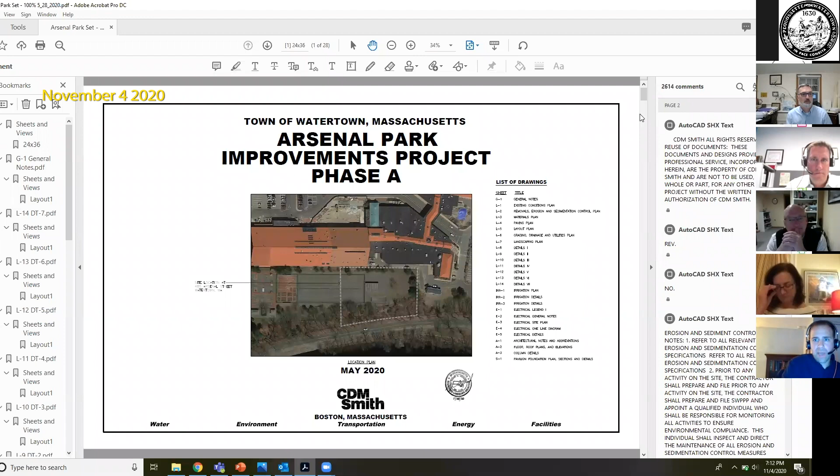Let me just grab that, and then share my screen. Let me know if everyone can see. Yep. Okay. I'm in the back part of the house, so my internet might be a little slow here. I'm relegated to the basement.

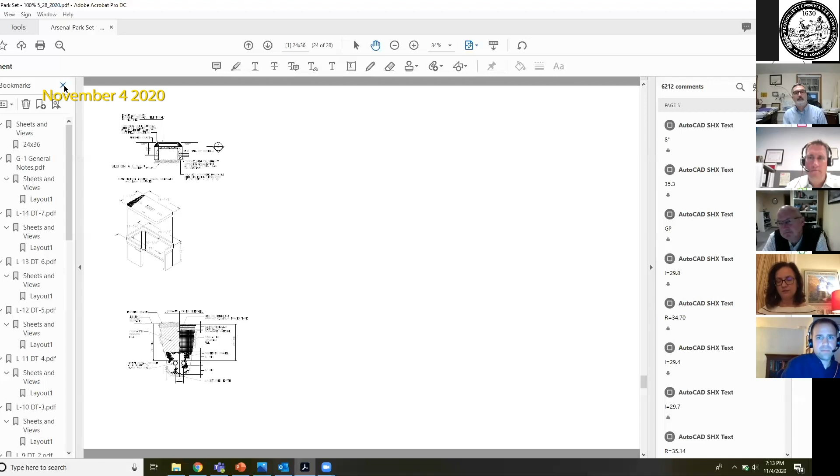While that's coming up, I'm just curious because I can't remember right now. The Phase A box on the graphic we were handed with our agenda straddles the community gardens. Is that in Phase B, or is the community garden in Phase A? The community garden will go in under Phase B. Okay, that's what I thought, but I just want to make sure.

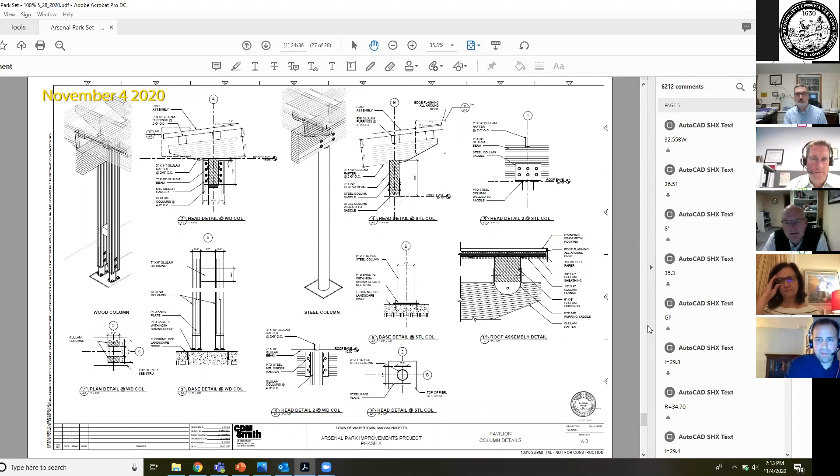Apologize for these drawings taking a second here. I think I passed the details, but I'll just start talking about it while we get to them. The way that these precast concrete elements work is that you should really think of them as a veneer. While they have all of the structural integrity of a normal cast in place element, you want them to be free floating so that you don't have to be pinning them in when you bring them onto the site.

So what we've done is designed essentially a concrete stair that sits underneath as a base, then you place a 3/4 to 1 inch mortar setting bed, and then these quote unquote veneered stairs sit on top of that. So here we go. Sorry, that took a minute. Now let's see if I can zoom in. I'm not sure why my computer is going so slow here.

For the various elements throughout the site, and I'll start with the lawn stairs because that's one you asked about, you have a little bit of an overlap between these veneered elements. So when you look at it, you're not going to see any of the sub base to that, but there's a full concrete stair slab that's poured underneath that, and then you have the mortar setting bed underneath it.

The veneered stairs have almost more of a granite look to them than a poured in place concrete, and then you have the benefit of having an admix color in there as well. So if one of these stairs were to crack or to pitch out of place, you could actually replace it to a certain degree, as long as you can get the color matched. But this is going to be much more stable than just having a normal poured in place concrete stair.

You have a little bit of wiggle room there for the final install of those more aesthetically driven treads that we're going to be waiting on. And it's the same thing for the precast berm stairs and the seat wall blocks that are going to be going in along the back terraced lawn areas. They all have a sub base underneath them. Thank you.

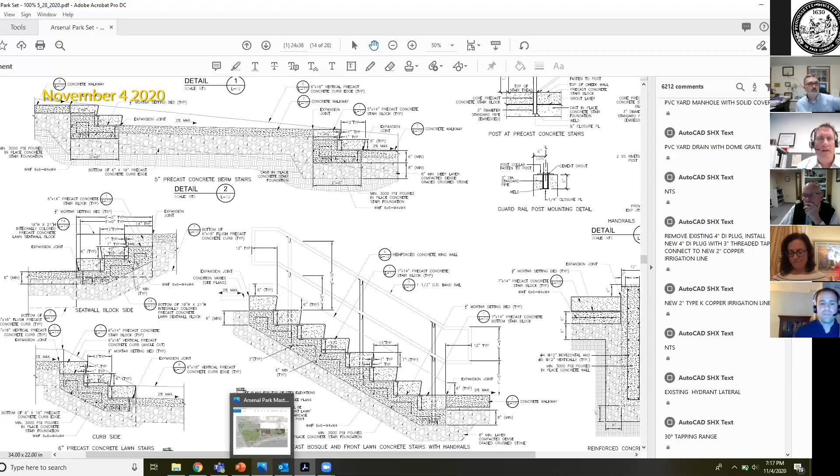He was going to berm up the topsoil too, there's a few inches of the root ball exposed. So he's going to mound up the topsoil around that for the winter protection. Right. And so then in the spring, they'll pull that all away and get everything brought up to grade, and then bring in the stone dust as a final.

Is mulch going to be around those pits, and the stone dust is going to go right up to the... Yes, and then we'll have the planting soil loam right up to finished grade with some mulch, and then there's ground cover plantings proposed for those tree pits as well. So you'll be able to recycle the mulch after taking it out of the original location. The mulch really should be on top of everything else, shouldn't it?

Yes. I think he's going to just mound up the topsoil around those root balls for the winter. I think he's going to bring in the mulch for each tree pit around the same time he's bringing in the stone dust next spring to clean that all up. It wasn't stated that way. I can find that out. I'm not positive, but I think that's what we were talking about at the last meeting.

He was just going to, because he's brought all the topsoil in. We went down like 3 feet with the topsoil, and we just have in between the tree pits where there isn't actual. It's the nice CU soil from Reed that we brought in.

Thank you. Anybody else, any questions before we go into phase B? Nope. Okay, thank you. Okay, Glenn, I'm sorry.

No problem. Thank you. So like I said, we're contracted to take it to 60%. Our goal is to get to 30% in early December and come back to you with an update in a meeting in this kind of a format, and then 60% by early January. And that's the point where we would hold the public meeting that the town council requires for all these improvement projects, and then do a presentation to the council after that to update them.

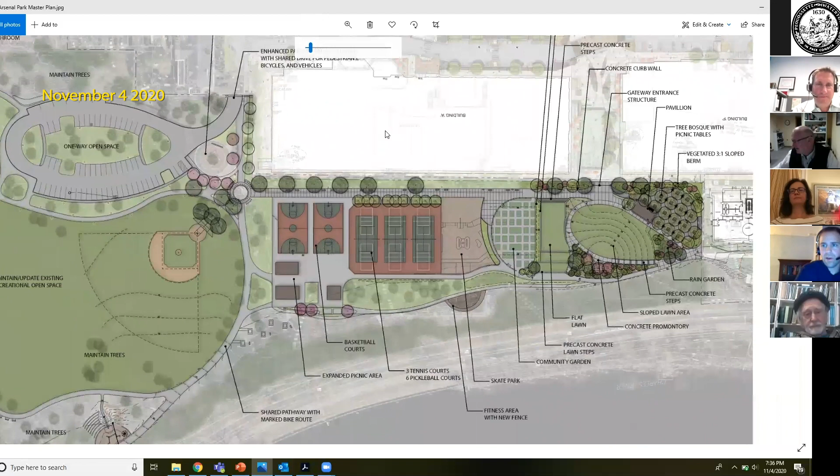Okay, sorry, Nick. Or is it Glenn? Who's doing it? Glenn, I'm sorry. I think we had moved to Nick just to go through. Okay, sorry. Great.

Okay, so I'll pick up where we just left off here. So the Phase A construction that Glenn just went over is everything to the east of this line. We have about a 4-foot berm, which is also going to be on hold right now because it might be a great spot for wildflower plantings for the community garden. Immediately off of that berm, we have the community garden area that we were just discussing. Directly adjacent to that is the skate park, followed by the rest of the active recreation, which is going to be the 3 tennis courts with the 6 pickleball court option, the 2 basketball courts, and this whole area is going to be lit with a new lighting system.

So I believe right now we're looking at 20-foot candles, and there's a question about whether or not the skate park should be lit. Yeah, Nick, I did reach out to Musco yesterday, and I asked them to give us 2 lighting layouts, one that included the skate park and one that did not, but that would provide a little bit of overflow lighting from the court area onto the skate park. So we'll have 2 layouts that, when we do our preliminary cost estimate, will give us a couple of options. Whichever way the commission wants to go with lighting that court area, we can do either one. So that might be something to think about.

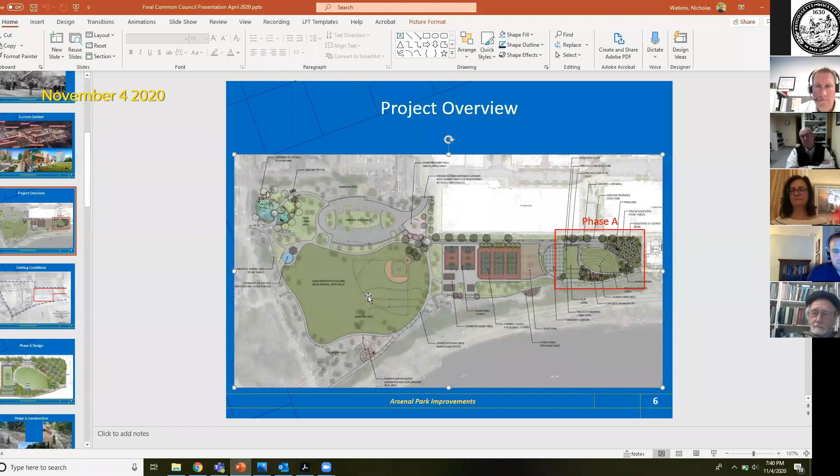Yeah, we are going to do one boring in the skate park area, but like I said, the problem is what we found on phase A, there's no really good historical information about where the foundations are. This building had gantries in it, and there's tracks underneath that are still in place. And there's substantial foundations for parts of the physical pieces. So when you hit them, it can have 4 feet of concrete.

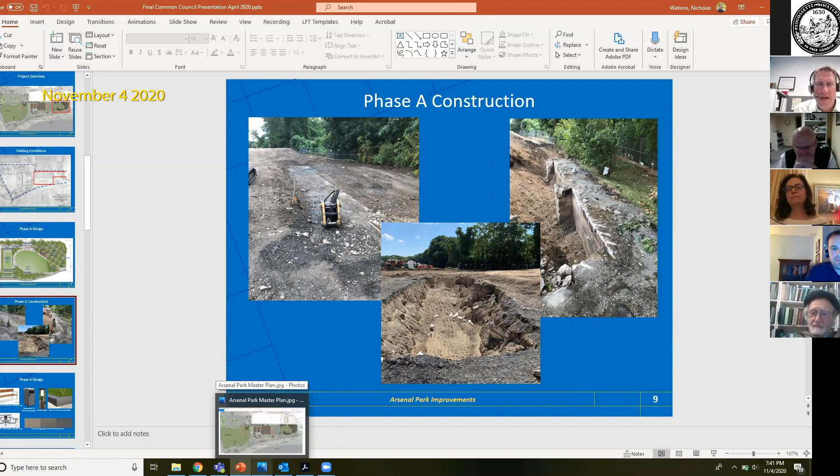Yeah, there's one we hit at phase A there on the far side. I believe this one was unexpected, right, Glenn? Yeah, and you can see how deep it is. So this is a major concern. So when we said we won't go down, that means they'll be building up something on the edges. To build the forms for the skate park elements, you'll have some areas that are raised up.

But either way, even like I did a bowl out at Hyde Park back in the early 2000s, and it went down about 6 to 8 feet, and there was some sound attenuation with that, but you really have to go down pretty deep in order to inhibit the sound that's coming from the use there.

One thing that we could explore, we have this planted strip here in between the areas, and I know that planted strips don't necessarily help too much with sound, but there's a possibility it could be slightly raised and there could be some trees, so at least there's that visual separation, which sometimes mentally helps you concentrate more on the community garden than what's happening directly adjacent to you. So we could look at extending that. Yeah, let's keep that in mind about the sound when we're working with this with our consultant.

Definitely. Yeah, it just sort of concerns me. I can just visualize something that I find right now a little startling, that the skate park could be way up here and looking down upon all the gardeners, and it may just be incongruous. But who knows? I might be overthinking it.

Well, we had discussed this before, and this is certainly an urban garden space. It's not the garden space that's in the middle of the natural area of the park, and it never was in this site, but it has good sun coverage and it has some qualities, and the majority of the gardeners understand. It's also directly adjacent to the Arsenal Yards building and the noise that it creates.

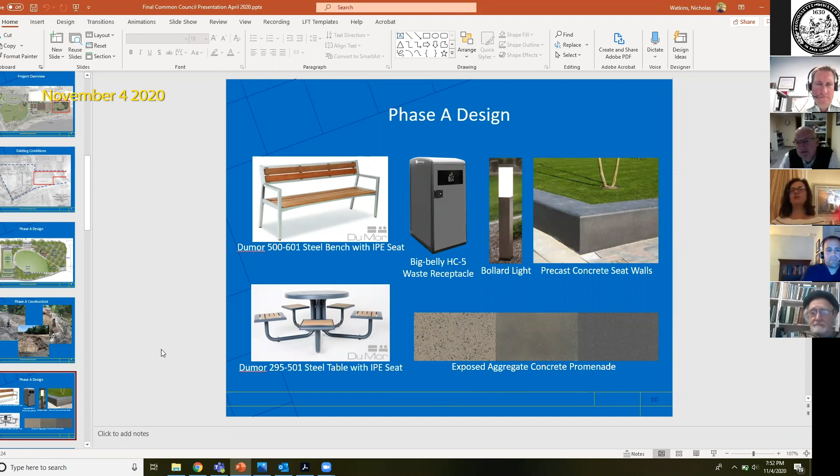Correct. That's not the exact bollard fixture we ended up with, but that's the scale of it. Gotcha. But we would not be putting those on the north-south pathway, just the main promenade, the east-west one. Right. Oh, okay. I think you can move on. Okay.

So I'll start now at the vehicular entrance to the site at the north here, where we're looking at mimicking the gateway structure that was placed at the entrance to Arsenal Yards River Green. This structure would have to be slightly enlarged to meet all the regulations, mostly for fire truck access into the site. It also serves as the main entrance, so having an attractive gateway feature there is something we're proposing. But we're not going to match the other one exactly, maybe an arch, a curved structure. We haven't come up with that design yet.

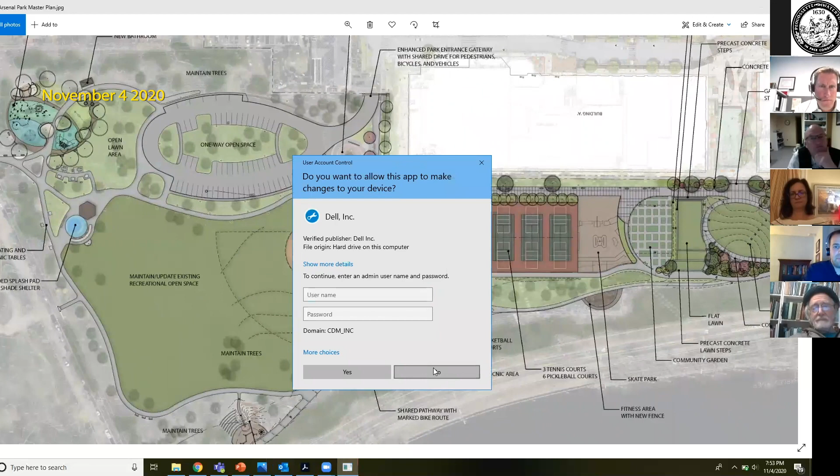A realignment of the existing roundabout. We'll be closing off the southern portion of this roundabout into the site and just having a two-way access drive, slightly realigning the roadway as you enter the parking lot. This area is really going to be a focal point of the site. This node is going to see most of the traffic moving in all directions, so doing something attractive here that reduces conflict for people moving in all directions is going to be a priority.

We have some great existing remnants on the site, one of the historic medallions from one of the brick structures, as well as the existing Arsenal Park sign, so we'll be looking at how to integrate those into the design. I know there was a proposal for some kind of trellis around this area, and I believe the discussion now is about going with something more at ground level, maybe some seat walls, and then using trees as your vertical element.

As we were just discussing, the multi-use path would just lead you all the way down to Greenough Boulevard, a lot of the DCR facilities that are down in this location. There's an existing gatehouse that's on the historic register, so looking at a way to kind of refurbish this entrance where there's a wrought iron fence is another element that we're looking to include.

Possibly just a couple brick columns, so this area will serve as another visible entrance to the Arsenal Park facility. There's a second entrance down there too that goes directly perpendicular to the river. When we had our most recent meeting, we talked about adding a couple more of those piers too. Right. So there's already two kind of entrance locations that we want to improve. And remove the barbed wire. Right. Yep, the fencing improvements will be included in that for this corner area.

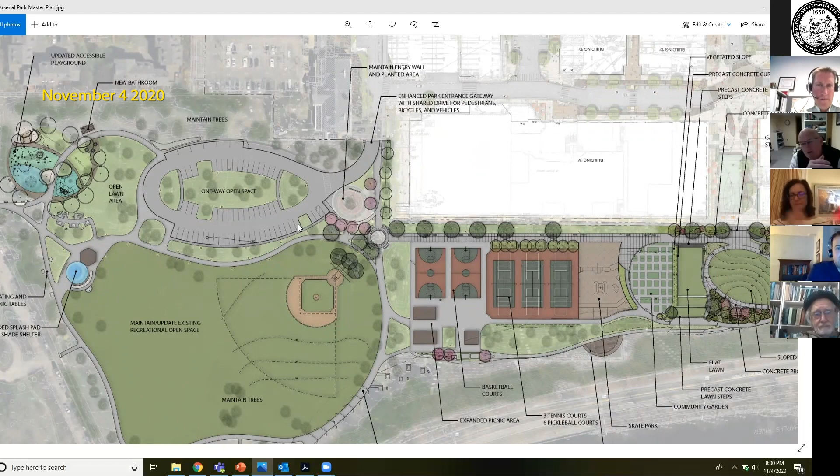Nick, I only have one question, and it's going back to the gate down at the bottom of the hill. Is that a historic gate? Do we have any issues with the historical commission if we do anything with that gate? Is that gate part of Arsenal Park or is it part of the road along Talcott?

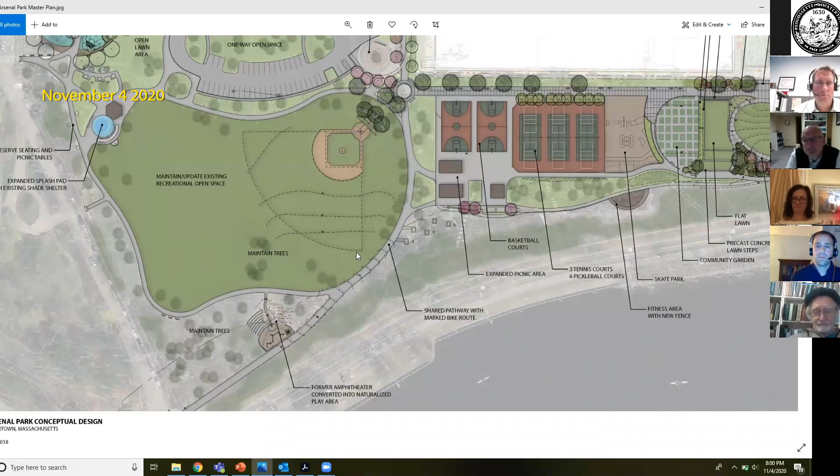You know, we'll look into that and verify, but it's actually rusted through and fallen over. I know it's in bad shape, but I'm just somewhat apprehensive about touching something that somebody might get mad at us for, you know? Well, we'll confirm. Steve and I will confirm if we have to get any permission to change or modify that area. Okay. Thank you. Does anybody have any questions on our board?

I just want to make one comment about the parking in the loop there, because you're narrowing it down, like you said, for this focal point. Just keep cognizant of emergency vehicles, that the radiuses are sufficient for ambulances and fire if needed, if Talcott's the way they would come in. And buses. Buses? Yeah, the buses. For the high school track, right?

Yeah, and I do actually think this is going to be a big improvement to the existing traffic pattern. Having driven through here a couple of times, it's very confusing. I think you want to make that notch at the end come out even further so that people are forced to take a right to go around the loop. Right. We did that at Filippello under the revision. When we redid Filippello, we actually put a one-way sign up and we put arrows on the pavement.

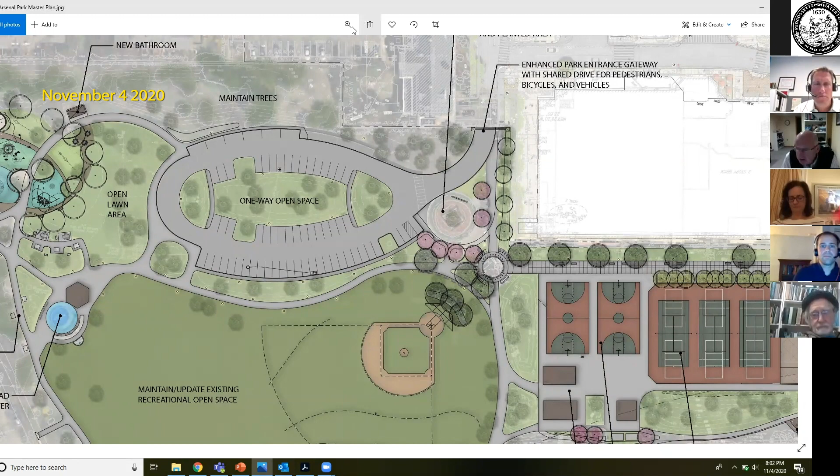So I know we have some other guests here. Do they have any comments or questions? I guess not. Okay. So the status is we're going to see something in December? Do you have a November meeting? This is it. Oh, I'm sorry. Yeah, December. First week of December, Glenn. Yep, we'll be coming to you with the ideas for the big play area, and anything else we've advanced, so we'll definitely be back to do something similar at your next meeting.

Okay. Well, thank you. Thank you, Glenn. Thank you, Nick. Okay, bye. Thank you, everyone. Appreciate your time.

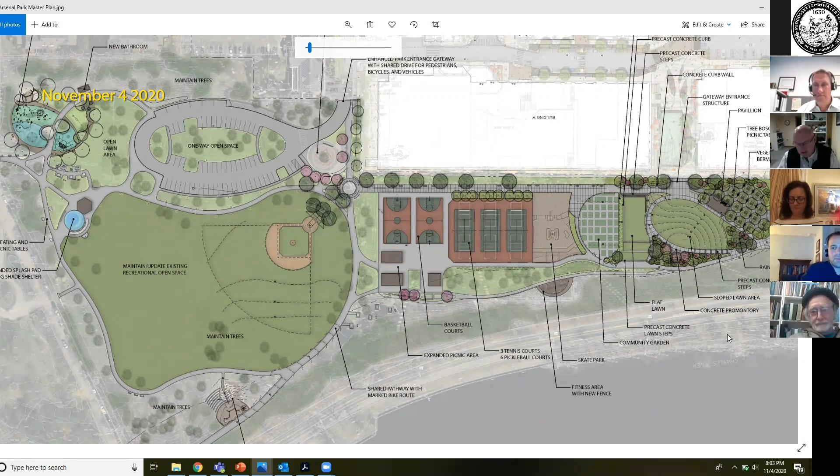All right. So the next item on our agenda is the minutes, and unfortunately, Laurel, I know that Susan has some issues and hasn't been in much in the last month, so we should continue that to next month. I'd like to continue those minutes until next month.

Yep, fine. So the next item is, you'd all asked to discuss the 650 supplemental information that the applicant submitted, as per our order of conditions. I think you all got it. It's just a discussion, because they've pretty much planted the plants already. I saw their plants in. So anybody have any comments?

Yes. Okay, Maria. I have a couple of requests to Laurel, really. One is to make sure the order of conditions does get recorded for this project with the O&M plan. Is that already recorded, since they already started?

I can double check. Yeah, if you would just look into it. Then there's something that, as I walk through that area, I wish we had asked for, but I'm wondering if Laurel or even Gideon could look into it. Did Gideon leave? Yeah, but I can talk to him tomorrow.